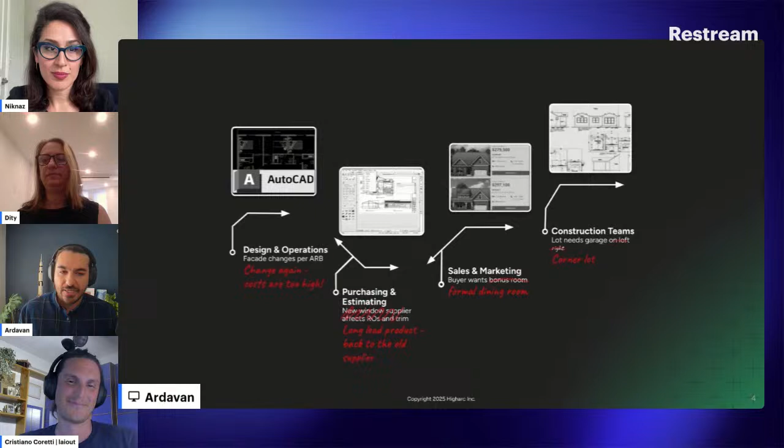You know that in the design and building process, there is this workflow in which you need to produce documents, go through procurement, sales and marketing should be aligned with you, and then you have the construction team. But this is not a one-way street. It's actually a kind of back and forth process in which different people have different ideas, different words to say, and it means that you need to go back and forth, back and forth, and get a lot of comments to incorporate their ideas, their points of view, and their edits.

But the problem is that we are working with static plans. These are dumb documents that are usually in the form of PDF. They're sometimes not searchable. They're not dynamic. If you change something in that workflow, you need to go back all the way to the beginning, edit the file, then manually propagate those changes all the way across the process. And this actually holds us back, costs us time, costs us money. And on top of that, the product data, financial project data, and customer data are not combined together, not connected to each other. So there is a static document, and then there is fragmented data across the platform.

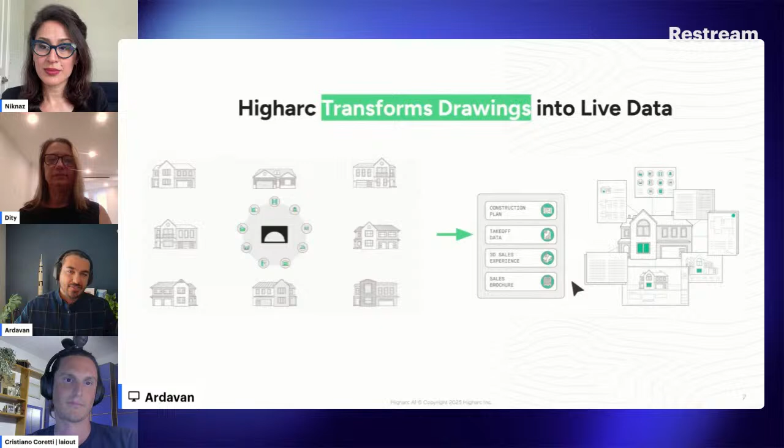So Higharc is trying its best to solve this problem. In order to do so, we have this idea of transforming drawings into live data that can be propagated from the drawing table all the way to the construction document. So if you change something in the workflow based on feedback from the construction team, the design team, or the financial people, you can do that, and it's going to automatically propagate all the way across. So your building team is going to be aware of that. It's going to be incorporated in the construction drawings. And also your sales team is going to be aware of that. So it is going to solve that problem of fragmented and old format data by converting it into live data.

Now, how we do it: we have a suite of different products. The flagship that I like the most is the Studio. You see it on the left side. It is the place where you can do the design and also implementation, and you can introduce different options and different configurations into a house. So basically, it's going to give you a lot of flexibility. And then it brings the data onto the cloud in our single source of truth that communicates with the rest of the products that we have here. For example, we have an estimation tool that basically gives you a list of materials, the cost, and everything is included here. So as soon as you edit something in Studio, you will immediately get back the price reflection.

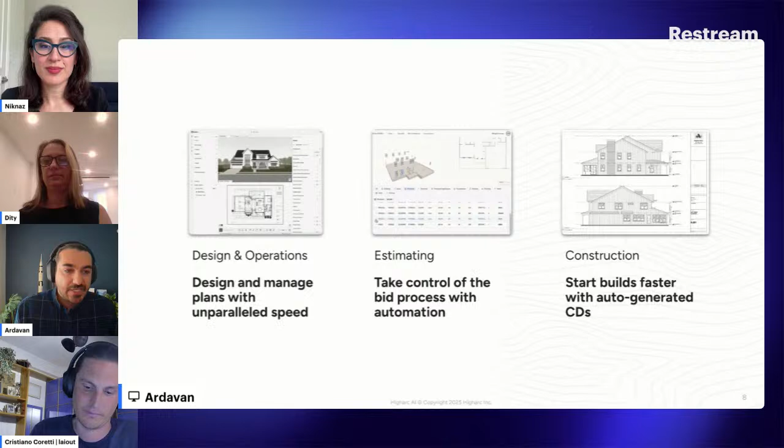The construction documents are also something that we produce at the end of this pipeline that actively gets updated. And in order to make the whole pipeline complete and have the user and buyer experience properly here, we have a sales and marketing interface, which we call the showroom. And then we also have, slightly separated from this very seamless process, these interior walkthroughs and visualization service. I would like to ask you to pay attention a little bit more to these two types of visualization, the walkthroughs and streetscape, because I think there's something really important here that I'm going to get back to later in this presentation. So just pay attention to the level of detail and the level of fidelity that we have compared with the original drawing.

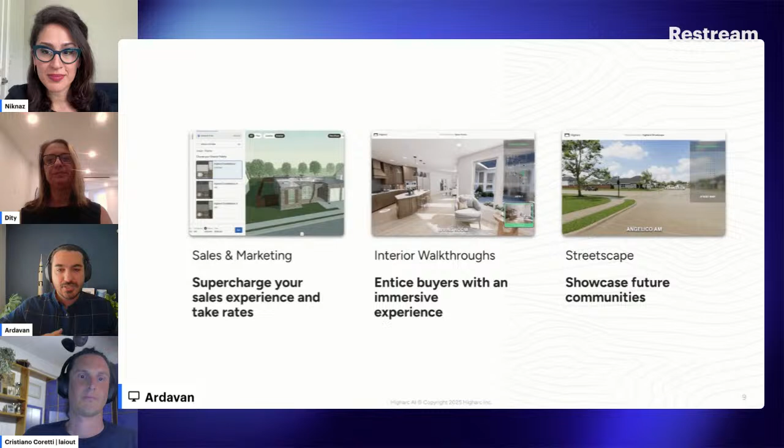So this is basically what we do. We make sure that we have a single source of truth that everybody who has a word in the process can actually incorporate into its development, and everybody is on board. Then I joined the company around 2 years ago, and for a period of time, we were thinking about what would be the proper application of machine learning in our pipeline to add value to our users, rather than having something that's nice to have.

So we've done a lot of brainstorming. We talked to our clients, we talked to the team that we have in-house, and we came up with this idea: what if we can translate these dumb drawings? By saying dumb, it's not disrespect. I just want to mention that it is not active. So it's just like a piece of paper or raster drawings, into live data that we have in our Studio. And our Studio uses a lot of explicit AI, the old school rule-based system, to convert a room into the whole BIM system.

But we wanted to see if it's possible to use machine learning to make it a little bit easier to go through this process, so going from static drawings into a live 3D BIM model.

So we started to work on three main features that are basically powered with machine learning to do their job. The first one, if you want to implement any plan, is to figure out what is the scale of a drawing. And this is an example.

This is the latest version that I just recorded about 20 minutes ago for you guys. You can see we have a complex drawing with a lot of details, and we just hit auto scale. It reads the document and figures out what the scale is. And if I zoom in, you can see that line is like 20 feet, and I measured it, and it is 20 feet.

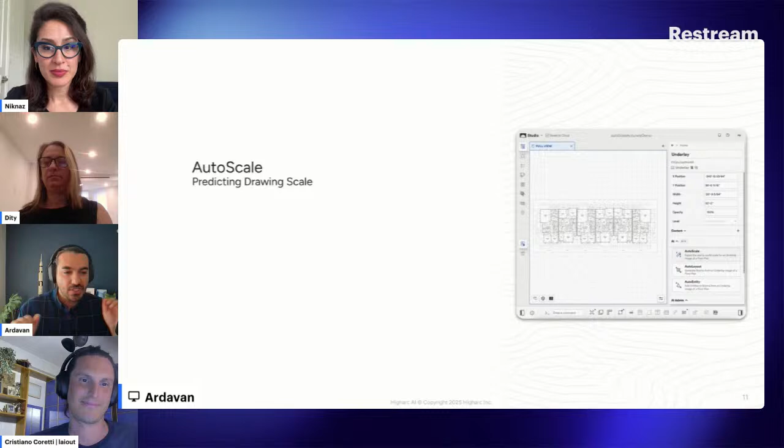The extra fraction at the end, like half an inch, is basically the level of detail you can go based on the pixels. It has some limitations. If there is a dimension line, it's going to be super accurate. If there's no dimension line, it can infer the scale from objects, and it even can read the text inside the document and figure out the proper scale. But when you have a dimension line, it is 99.9% accurate, and I'm so proud of that one.

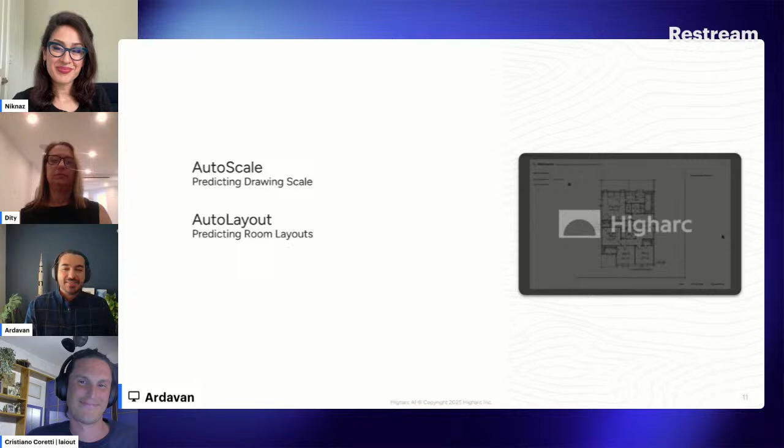Then we have auto layout. The whole idea here is, if you have a drawing of a plan, doesn't matter if it's a construction drawing, a brochure, or even a nicely drawn hand drawing, is it possible to convert it into the representation that we have in our flagship software, Studio?

We worked on this one for a while. It is a very time-consuming process because we needed to take care of the data pipeline. We had to label the data, train models, and integrate it into our workflow. And right now, it's capable of doing a task like this one.

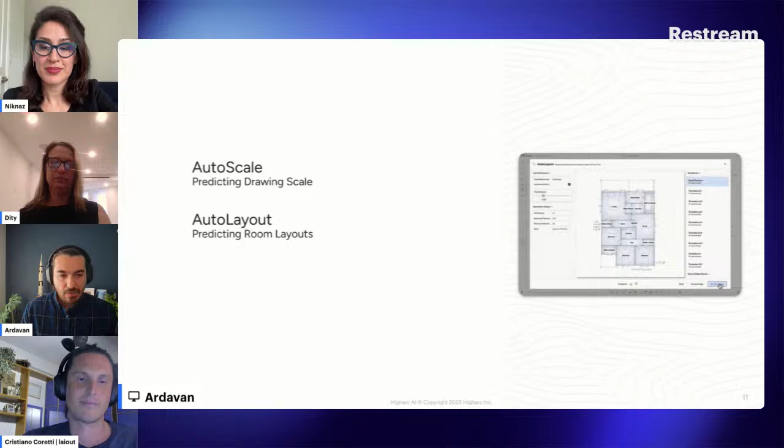I'll show you a demo a moment later. But it not only recognizes the boundaries of the rooms with walls, but also figures out what type of room it is. Because, for example, if you want to do some estimation based on this tool, you need to figure out if the room you're measuring is a kitchen or a bedroom. There are different costs for each one, so this does the job for us.

And one part I'm really, really happy with is that it doesn't need to see any wall between the rooms. For example, if you have a living room and a dining room and they are in an open plan, it still can recognize and distinguish between them and put the boundary between them.

And the last feature that we have here is called auto entity. It basically looks at the document, and it sees toilets, it sees sinks, it sees doors, windows, and it's going to put them in the right place for us.

Together, all these three are called auto translate, and it reduces the time you need for the initial implementation from maybe hours into seconds.

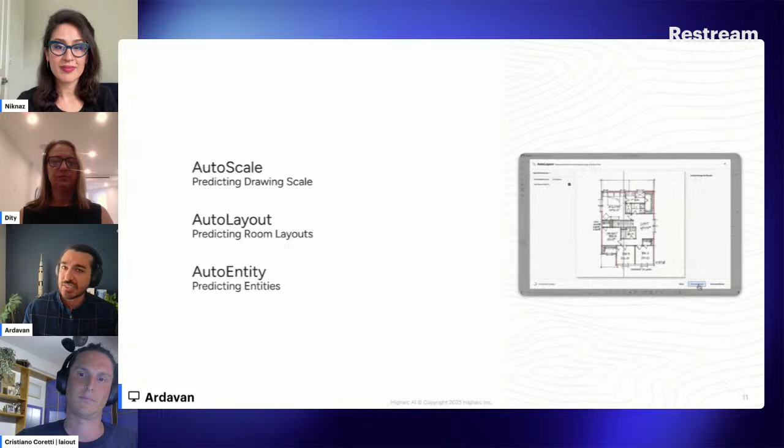And like any other product that's in the development phase, it is not the perfect solution. Right now it has some issues. I'm just going to show you this demo here, and just to clarify, this one is not cut. It's just one single video that you see here.

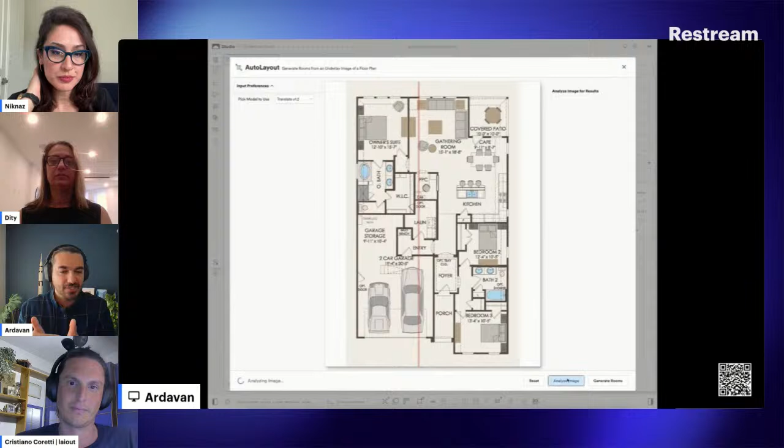So first, I just scaled this model, and then I actually measured it later on. I realized that, for example, the bedroom at the bottom, which is 13 feet and 4 inches, is actually right now in this drawing scaled into 13 feet and 3 inches. So we have a small error.

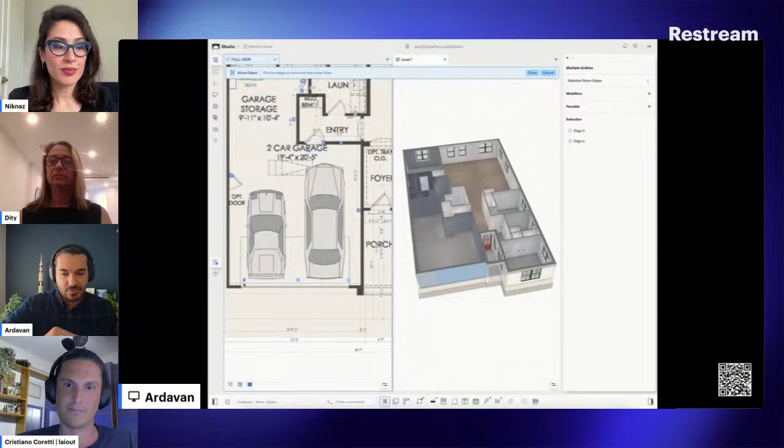And you can see that it actually recognizes all those rooms, and there are some small errors, like the boundary of this garage is not correct. But I can edit that in a matter of a fraction of a second. And also, it's using one of our earliest models, so right now we are even more accurate compared with this one.

But because we have this Studio system behind this, as soon as I give it the boundary of the rooms plus the label of the room, it automatically populates a lot of information about it.

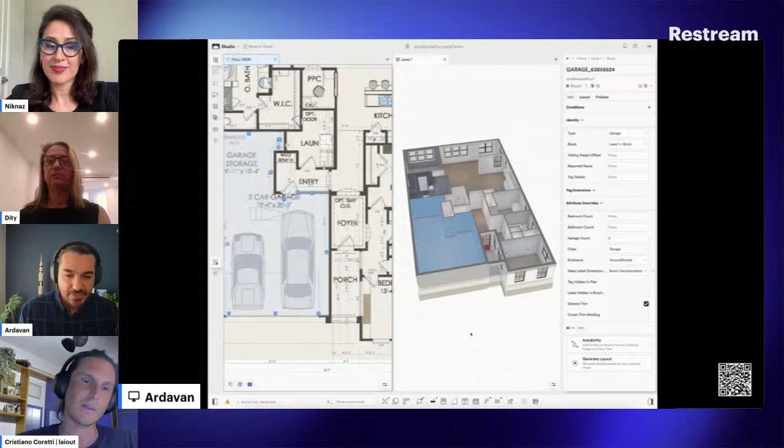Pay attention to the fact that the cafe and gathering rooms are basically one big space, but it recognizes that they are different rooms. And then I use the auto entity to place, for example, toilets, cabinetry, and doors and windows. Again, it recognizes most of this stuff, but there are some errors. For example, the garage door was not there, but it was recognized. It's just a matter of fine-tuning our process.

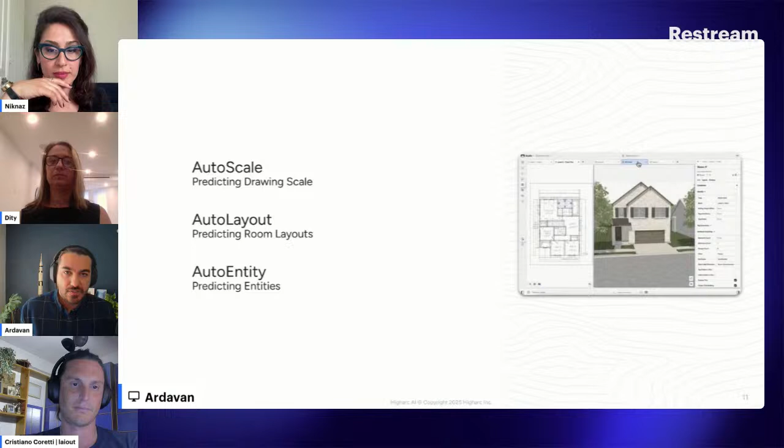To be clear, this is a feature that we think has a lot of potential. First, in quick implementation, allowing people who are not very accustomed to design software to actually be part of this conversation. So if you want to have some design sketch at the earliest stages and see what the price would be, or what the assessment or estimation would be, you can do it. If you want to quickly implement something to share with someone else, this gives you that option.

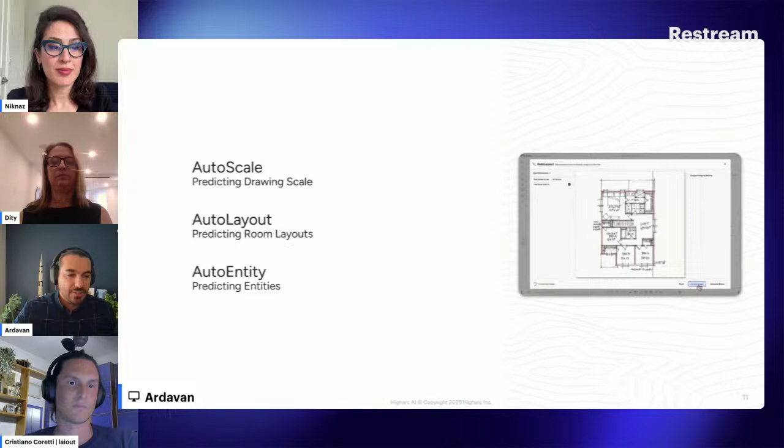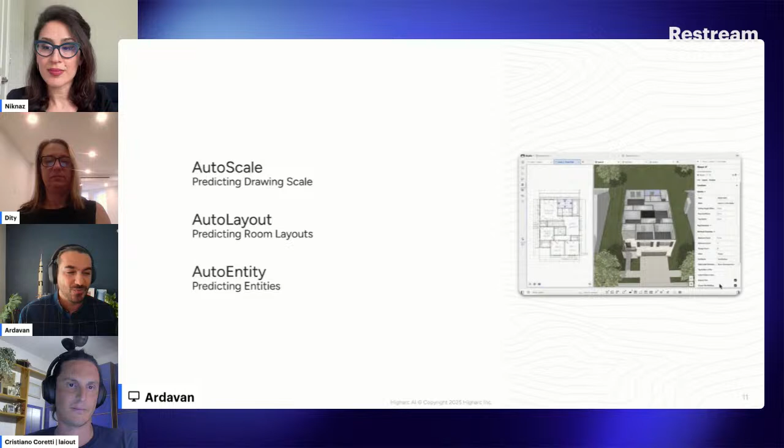We had even lower fidelity drawings, like hand drawings, that it was working. The QR code on that slide gives you the link for another video that Michael Bergin, my manager, provided a couple of weeks ago. You can see that even a child's drawing is properly working with this workflow. So this is what we are doing. But...

If you want to think about how generative AI, or to be more specific, generative machine learning at the moment, is going to play a role in AEC, I would say there are some new horizons we can look at. I cannot confirm or deny if we are working on these topics or not, but these are some of the topics I see floating around, and I think there is value in each of them.

Just to be clear, whatever I showed you recently in the previous slides is mostly discriminative AI. That means you have an object, one input, and you figure out what label is associated with it. When we talk about generative AI, it means you are going to generate new material, for example text and everything.

So I think the first level, maybe the low-hanging fruit for Gen AI in AEC tech, is to use it for low fidelity, vibe-checking visualizations. The reason I'm talking about this is, if you're selling a house based on a visualization and you show a doorknob here on the door, and then sell people something else, it's going to be a problem. So if you just want to make low fidelity visualizations to give people a vibe about what's going on, these models are pretty great.

Right now there are some models you can run on different platforms through APIs, doing in-painting, style transfer. That's actually really great. I think there's a lot of potential there.

The other thing is taking care of data processing. If there's a piece of data that's not structured, not in the proper format, coming for example in a printed catalog from a vendor, and you want to bring it into your system or organize it, these new large language models—and honestly, large is not doing it justice—are more like massive language models with a huge context window that let you dump thousands of pages of material into them and ask them to process it. I think there's a lot of potential there.

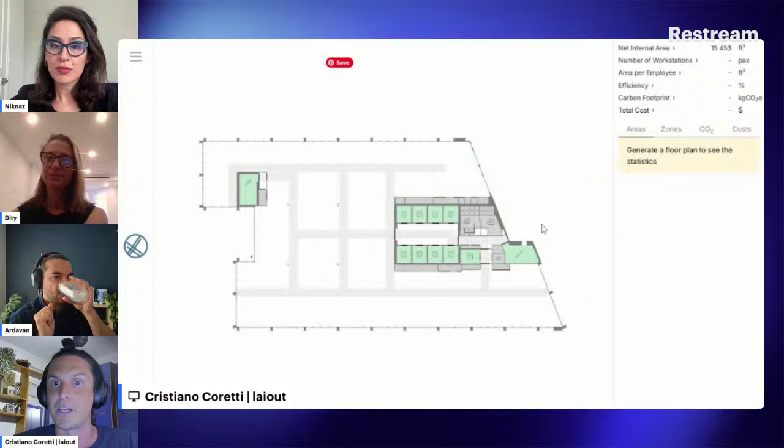I can just click and it takes about 2 to 20 seconds, depending on the type of building, and you get your first options. I didn't put any request here because I just wanted to show that we can actually do it in a second.

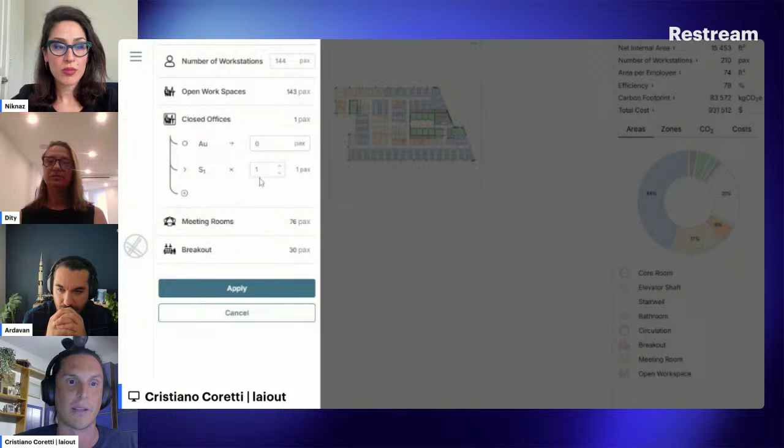Then what happens? You can open the preferences, pre-fill, and say, let's say I want 10 offices, and decide I want this one to be 110 square feet. I want, say, 10 medium ones of maybe 220. And you see that a lot of other information is pre-filled too.

Because we provide insights that come from the usage of other people. We did a lot of interviews, more than 400 interviews and surveys, so we collected data on the habits of people in certain dimensions of offices.

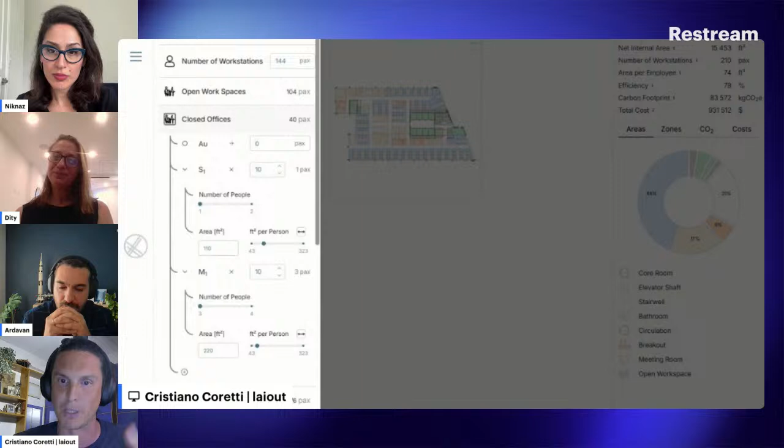Advanced settings let you change daylight constraints depending on where you are in the world. In this case, we put presets also for fire regulations. You can change and customize the clearance and every single characteristic of the building. Just click apply, click again, and you get another set of floor plans.

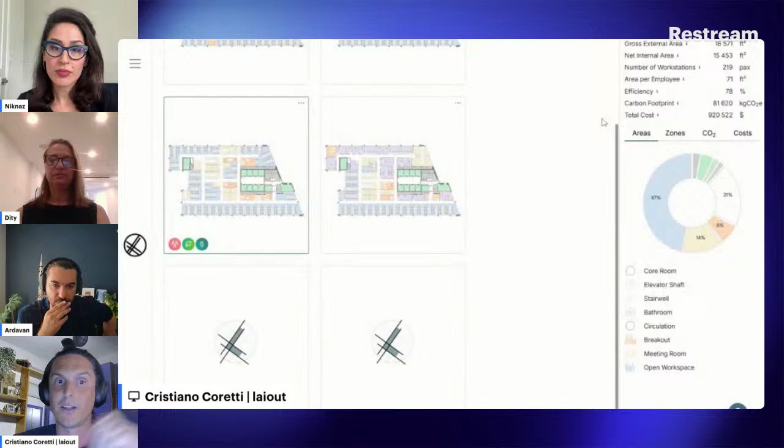So those are generated, and once you're here, you can see the data rapidly popping in - the area per employee, the number of workstations, the efficiency, the carbon footprint, because we also care about measuring every single element inside.

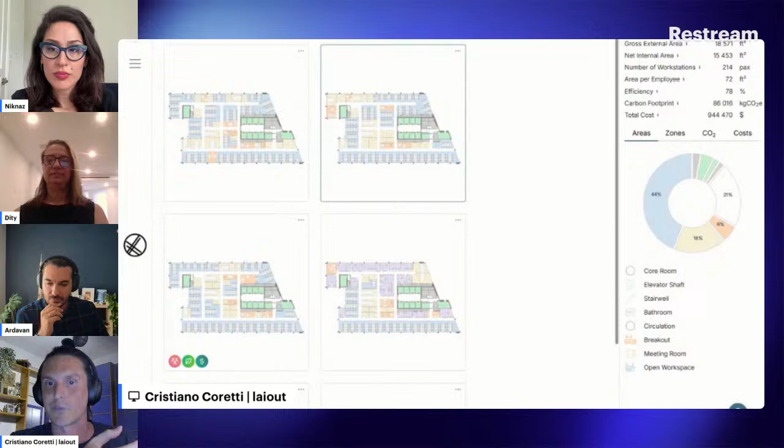So while, for example, Ardavan, you were showing the outside, the quantities outside, we focus, of course, on what we designed, which is the inside. It's pretty much the immediate step afterwards.

And the pie chart - the moment I start to move my mouse, you can see that every single piece of data is updated, because of course we provide different evaluations of the space.

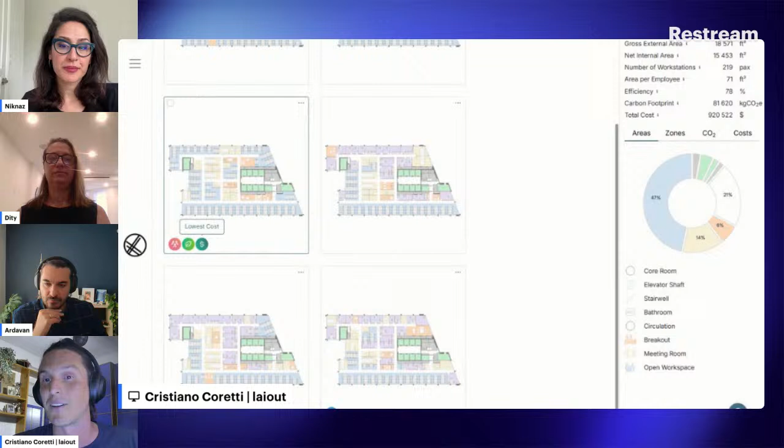And then the icons also guide you through the choices. So you have the client that wants to spend the least amount of money, the one that wants the highest density, lowest carbon footprint, or the most spacious office.

And then once you're here, you can, for example, jump onto a floor and get the dimensions. This is not meant to be perfect, because this one was generated in 2 seconds, so of course it won't be perfect, but I can immediately customize it.

I want to have a reception here - I can just go here, reception, and you get a reception. I want this to be, for example, a lounge space - I can go seating, for example, and have a lounge. I want this one as a small kitchen - I can go office services, tea point.

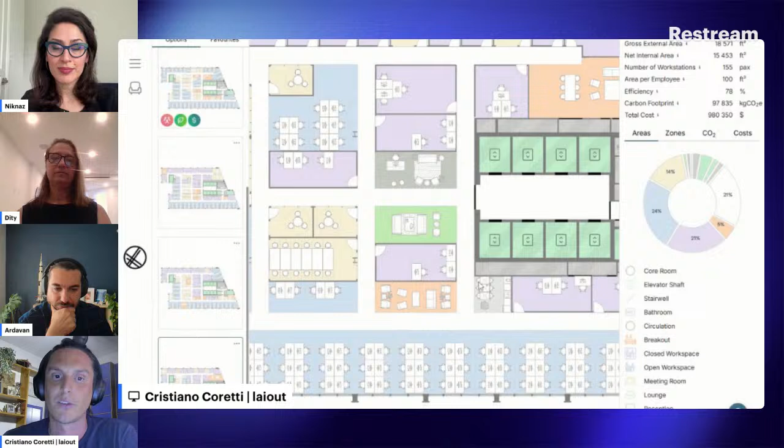So you can change very quickly and iterate, and of course visualize everything in 3D. You can jump between 2D and 3D, update, and every change you make in the app has a direct impact - I change a room, remove some desks, tweak things.

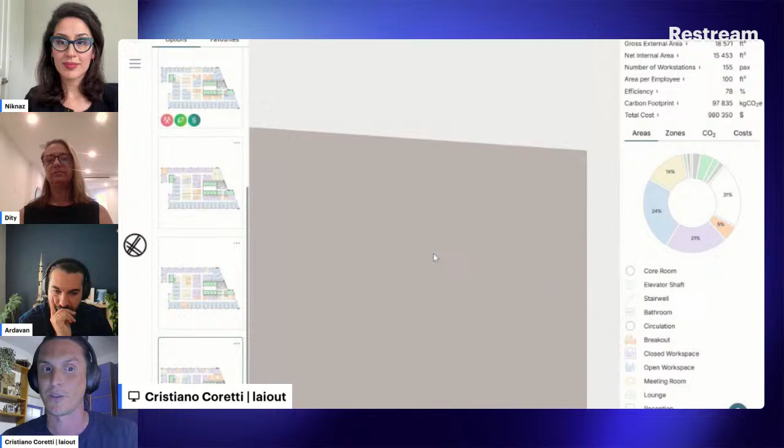You can move around. You can literally double-click exactly as you do on Google Street View - you double-click and you can literally jump inside the floor. You can change the visualization style, and you can change the camera.

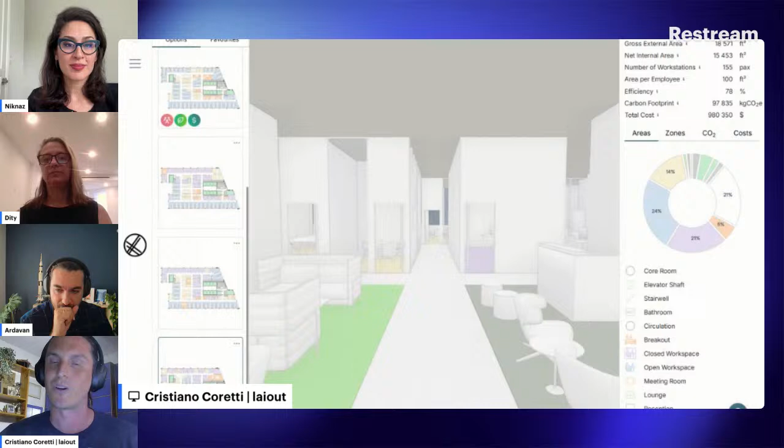You can have, for example, different ceilings. You can change and tweak, for example, if you want to do just the schematics. Many people in the call will be architects, and they are used to seeing these very cool white schematics that just help people understand what they're doing. So in a simple way, you can use this one also for schematic visualization.

And once you're here, you can save, you can export in multiple formats, Revit files, share links so that you can actually share on a website. We have, for example, brokers that create floors, or the design team creating floors. So they share them on the website, and it's very good for sharing information very quickly.

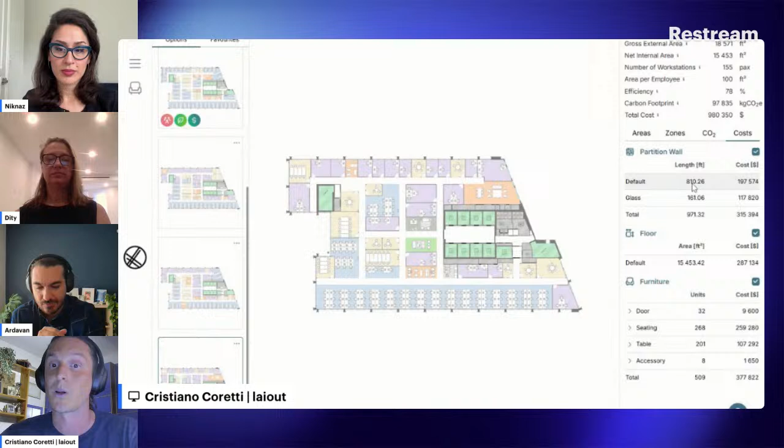And also from the cost perspective, we quantify everything that we design. So every single element is quantifiable because it's measured. So how many chairs, how many tables. You can go into the level of detail of creating a procurement list directly.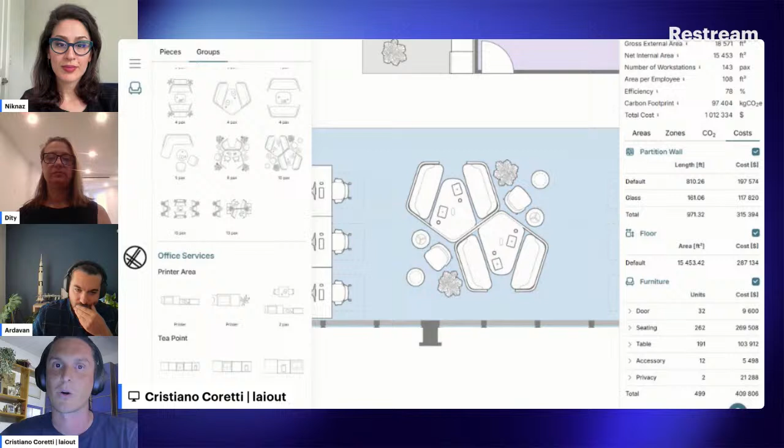But of course, for example, I don't like this part. I want to add some other details. I want to add some pods. And then I can go back, for example, let's say I'm talking to a client that wants to add more pods within a design. So they can just jump in and simply see that actually the design changed.

And for some clients, for example, we activated some services for AI renders, so they can do live renders directly on the spot. Of course, we don't do it for every client, but there are some specific requests.

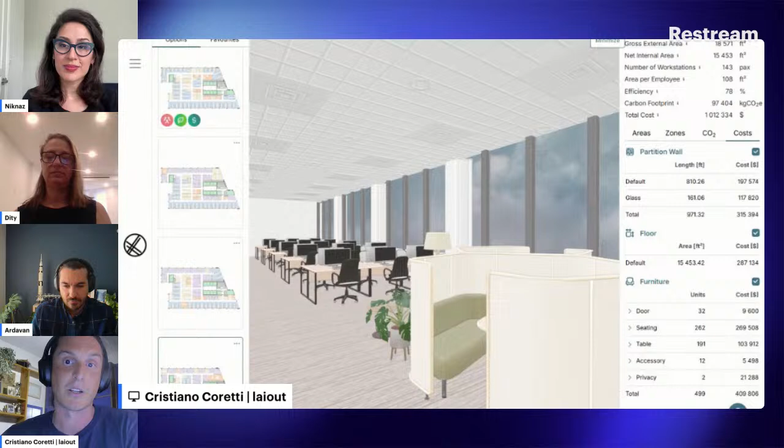So in reality, it's a fun way because what you see here, compared to other software, takes roughly 1 hour to learn. And literally, we train people globally, as we are at the moment in 35 countries. We simply train people to use it, and they learn in literally a matter of minutes. So once you're here, you can export to different formats. So this is pretty much the way the app works.

But it's not only from architects. As I mentioned before, and Niknaz probably was going to ask me at one point, we don't work only with architects. Architects are quite an important part of our workflow, but we work with developers, operators globally, brokers. You go from China all the way to the US, Colombia, Brazil, South Africa, Australia. India is one of the biggest markets, for example. So we work in pretty much every space, because what matters is that what we provide is a solution to a problem that is heartfelt by many people globally.

And at the end of the day, we all work for the final users. They want to have an output that is quick and good enough, and that also makes them feel part of the design process, because unfortunately the users at the end of the day are the ones waiting for a solution, while we provide a very quick one for them. So I'm done with the presentation. I hope it was quick enough to give food for thought for everyone here.

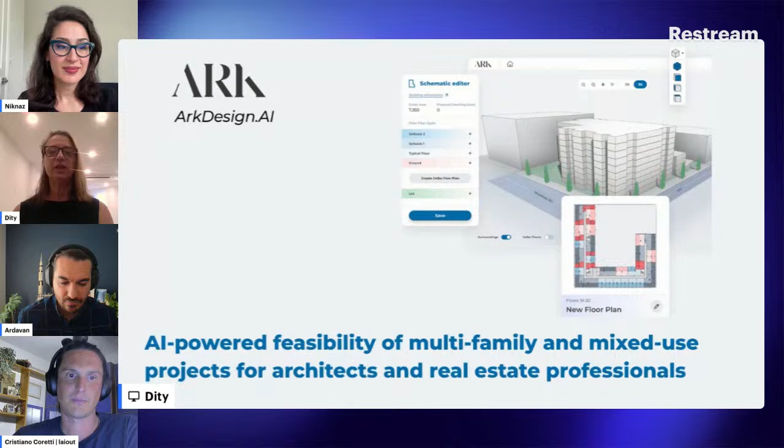I learned a lot. So I'm Dity, the founder of ArkDesign.AI, and we're a feasibility tool for real estate developers and architects for multifamily and mixed-use buildings, where the mixed-use buildings have a residential portion, and that's actually my background and the use case we're working on. So the problem with multifamily buildings' very initial design is that it's not optimized. It's very slow. It's human labor. It can take weeks, and a human can come up with one design option that is not necessarily optimizing the profitability of a project.

And today the process is multi-tool. Some architects are still using pen and paper. Some are using CAD. Everyone is using Excel. It's very important to actually know your sellable area, rentable area, habitable areas. That's very important for a project. It's critical in the early stages. And some are using SketchUp, Revit, there are so many tools.

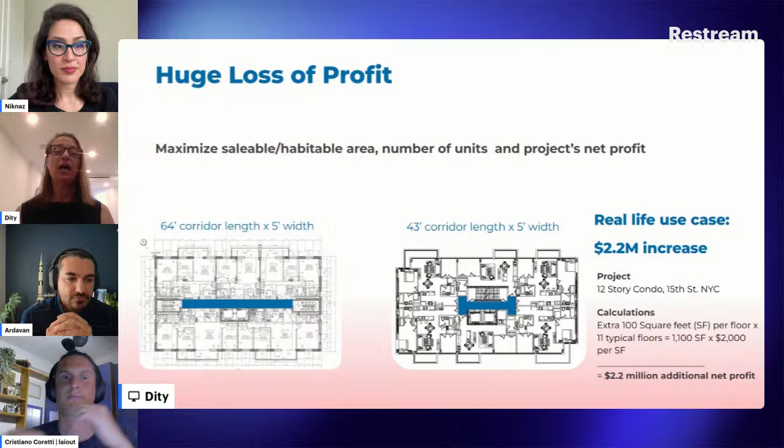Just for you to understand, can anyone guess the difference between the left and the right schemes? In the right one, the corridor is 20 feet shorter, which makes it 100 square feet more profitable per floor. It's 11 typical floors, and it's over $2 million net profit. So it's a very similar design, and this is the most simple building. Most buildings are much more complex, and there are so many ways to actually make your project more efficient.

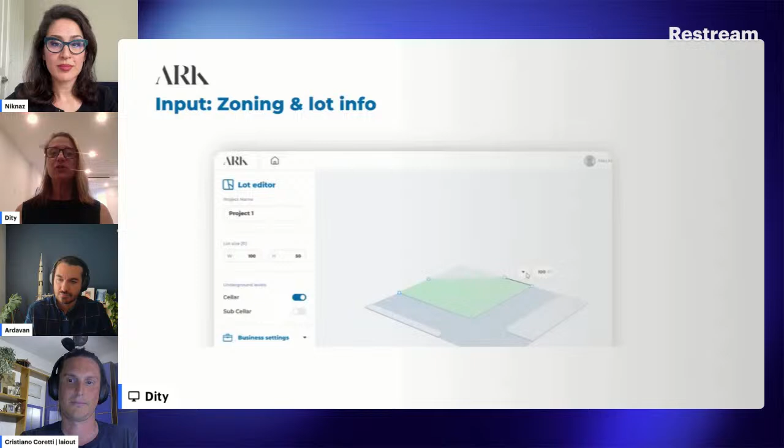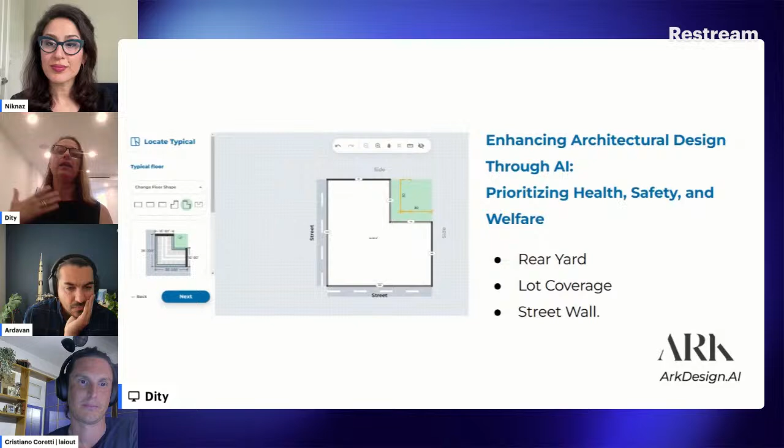So what we're trying to do is something very instant that can give the developer and architect many design options, optimized and up to code, like Cristiano was talking about before. In our product, the zoning of a place is actually the input. Then the software will generate the layouts in a very short process. It will offer the user templates and where to place them, considering rear yards, lot coverage, street wall and all the regulations it has to calculate. Then it offers a lot of layouts, first for the vertical cores and the circulation areas.

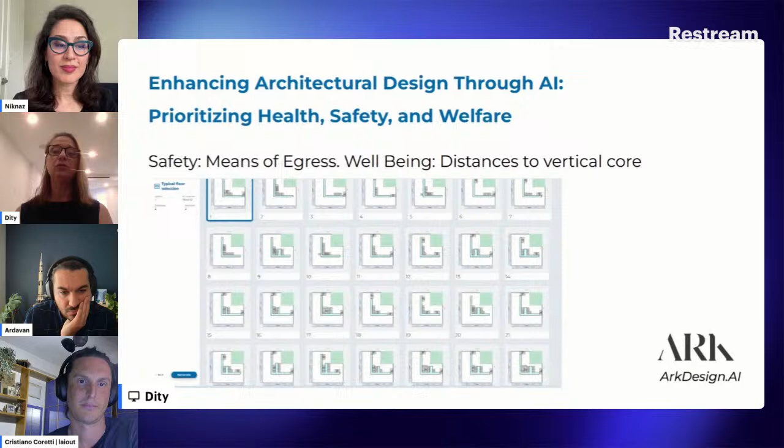And then one of the inputs for the system is actually the legal light and air walls, where the system can place legal rooms, bedrooms, living rooms along those walls.

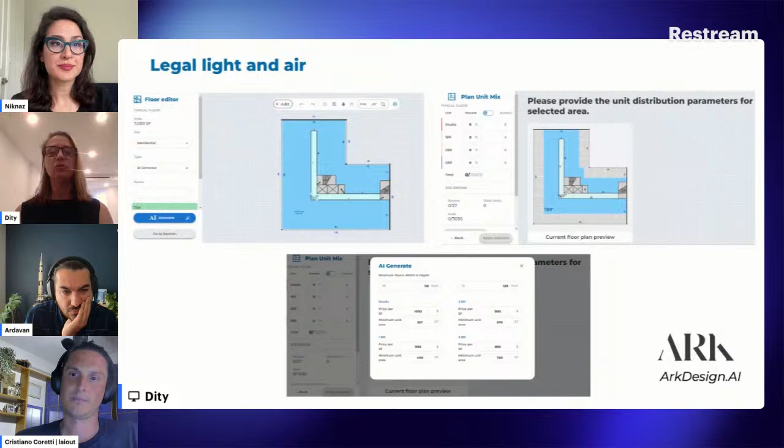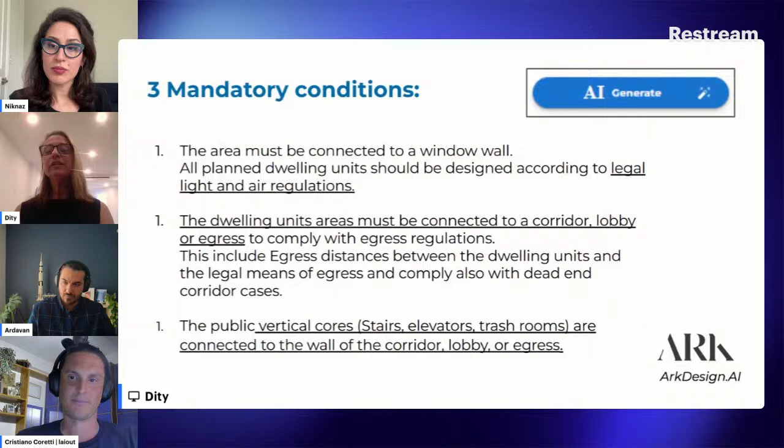And the system, this is something I'm explaining more for architects, but it has mandatory conditions. So all the dwelling units must have access to legal light and air. And all of them must have the egress that Cristiano was talking about before. The distance to escaping the building should be complying. And the vertical cores, the stairs, the elevators, should be placed correctly.

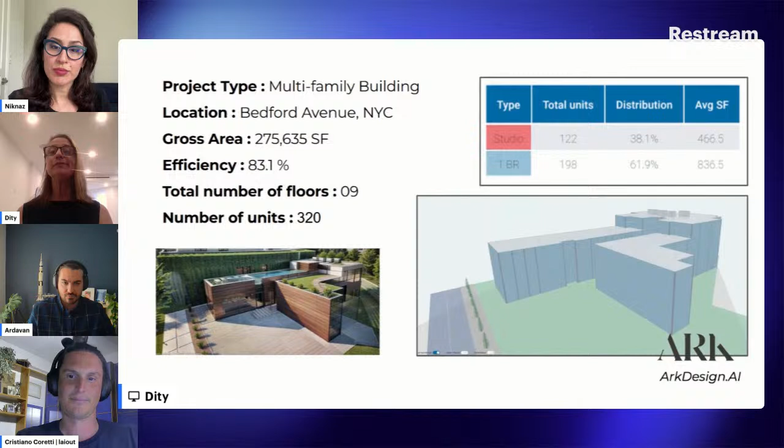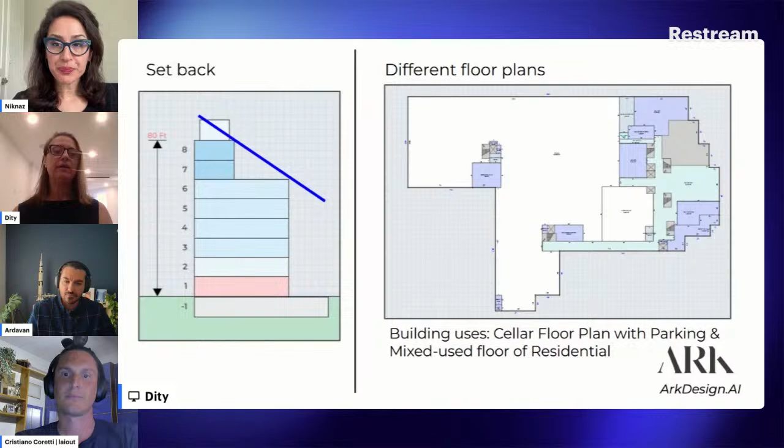And just to show you some use cases. So this is a multifamily in Bedford, New York City, and that's a 320 unit building. Let's go over the floors. So that's the mixed use and residential floors, the first floor and the second floor. But look at that floor. This is a residential floor, and that's fully automated. All the layouts that you see for the units are fully automated.

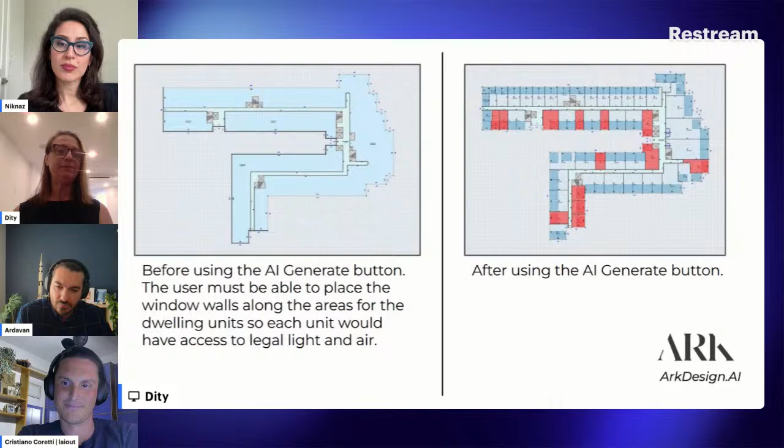And the system will not work if you don't explain to the system that you have window walls, like on the right scheme. In the left scheme, the system thinks it's all block walls, or in New York City, we call them lot line walls, where you don't have the legal light and air. And so the system will actually refuse to generate the units, like you see in the left scheme, whereas in the right scheme, you can immediately see that it's generated the units.

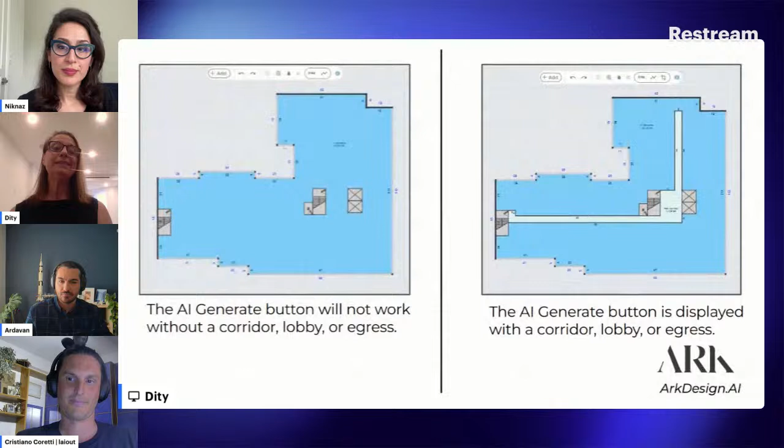That's another project in Broadway, New Jersey, with 136 units. And as you can see, the cellar, first floor, so that's just the schemes, but all the units must have access to the corridor and to the circulation and to the vertical cores. So that's the first stage of the design of a multifamily, your typical floor. And as you saw before, the efficiency of that typical floor is very critical, because the profitability of a project lies on that.

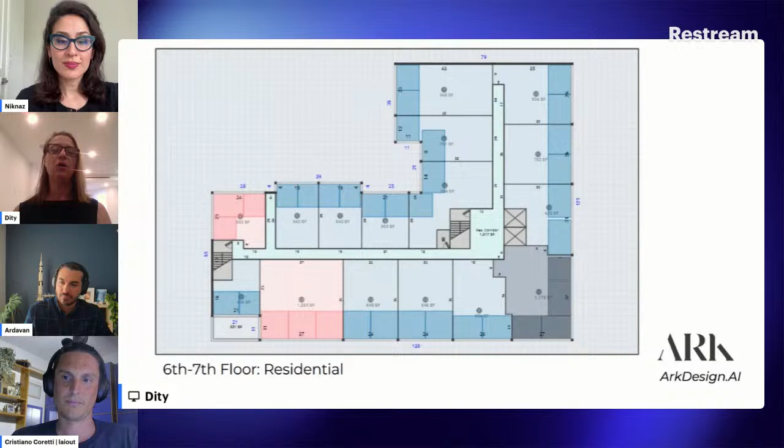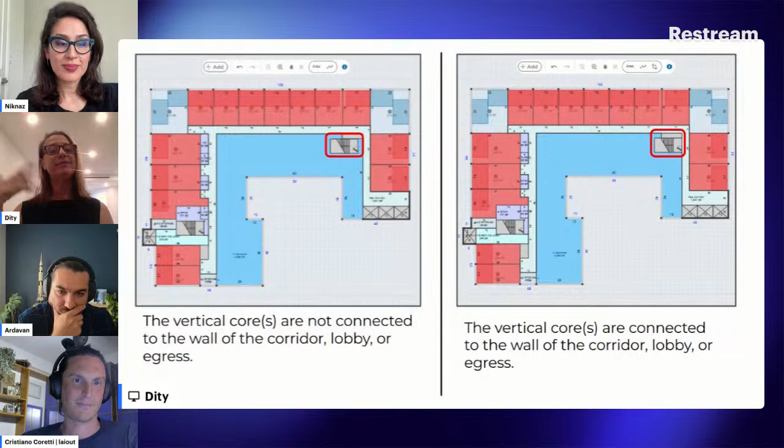And so if you don't have the right circulation, if you don't have a corridor, or it's not properly laid out with access to all the units, then the system will not automate the design of your dwelling units. That's another project to show you an example: those are the floors, but if you don't have access to the vertical core for the egress, and the distance correctly, where the vertical cores are disconnected from the corridor and not properly placed, the system will not generate the design.

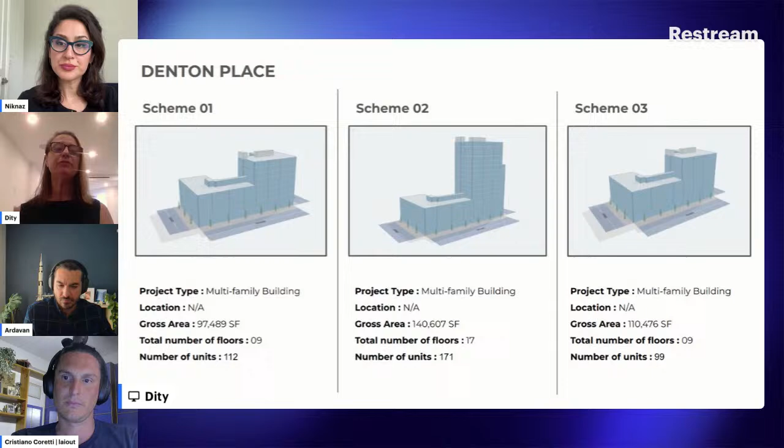Now, these are some use cases of Fisher McCoy Architects in New York City, and that was done by architect Fariba McCoy herself. This is a job where a client was debating whether to buy air rights or not, and there's some zoning, City of Yes, that allows them more buildable area. So different schemes, different floors, and she's doing these schemes really fast. She can evaluate three different schemes for the client before he's even purchasing the property.

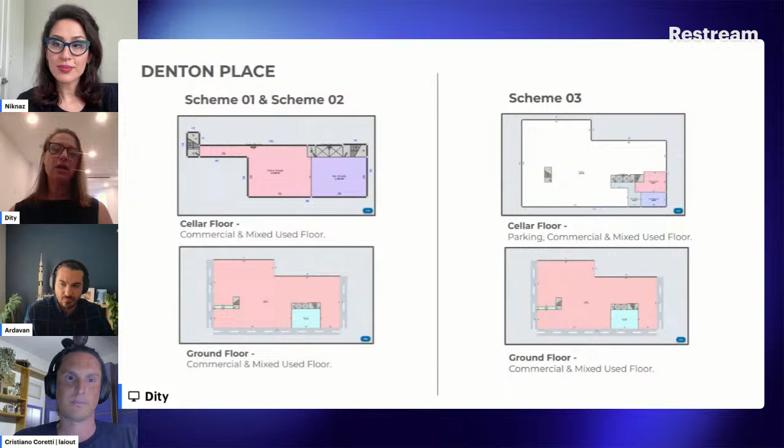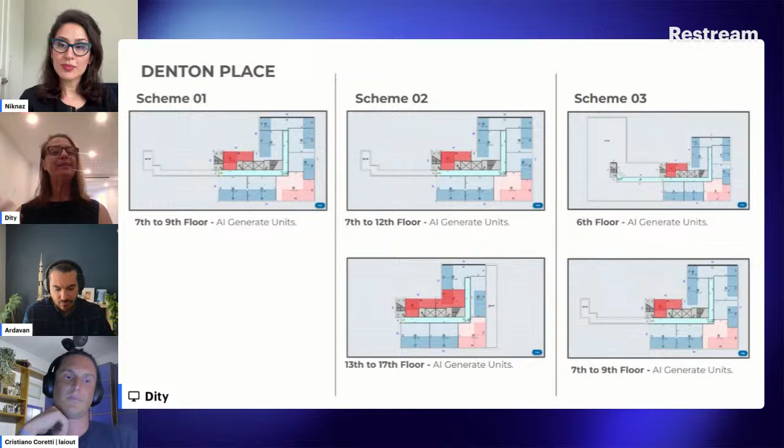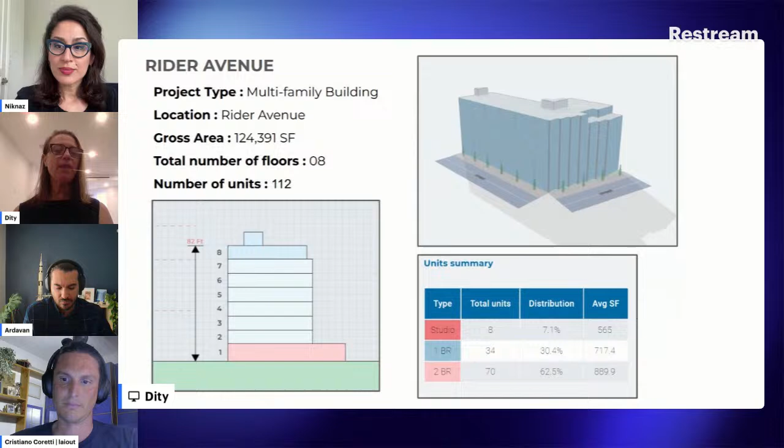And you can see the floor plates of each scheme and the differences, and it's very easy for the clients to start seeing what they can build. What really matters for developers is the unit mix, how many studios, one bedrooms, two bedrooms they can place, and then see the total of the whole building. Like you see the tables, gross and net area. That's another building. I think that would be the last building. So that's what we're doing, and I'm happy to answer any questions if someone is curious to know anything.

Thank you so much. Wonderful. Thanks so much, Dity. Thanks for showing us all these case studies and the projects. It's very helpful to see how the platform is helping all these professionals in solving real world problems.

So you do work with architects, right? Mainly. Can you tell us about your clients and what the process is like? I'm curious, where does ArkDesign help in the lifecycle process? Is it the programming phase or later, like in design development? It's mostly the schematic design phase, right? Can you tell us a little bit more about that?

So, as I said, it's the very initial design, where a real estate developer is thinking to buy a property, and even after, and they would like to see different options and their unit mix, and the sellable area or rentable area. That's very critical in the early stages, and they must know that the design is complying with the regulatory requirements.

So we're at this stage that pre-purchase the property, and also after they're purchasing the property, they can go more into details and play with it. Our users are architects, but I have to say that I see more and more engagement by real estate developers. Because, you know, instead of the clients just bugging them, let's try this option, that option, let's try 5-story, let's try 2 buildings, let's try 20 stories.